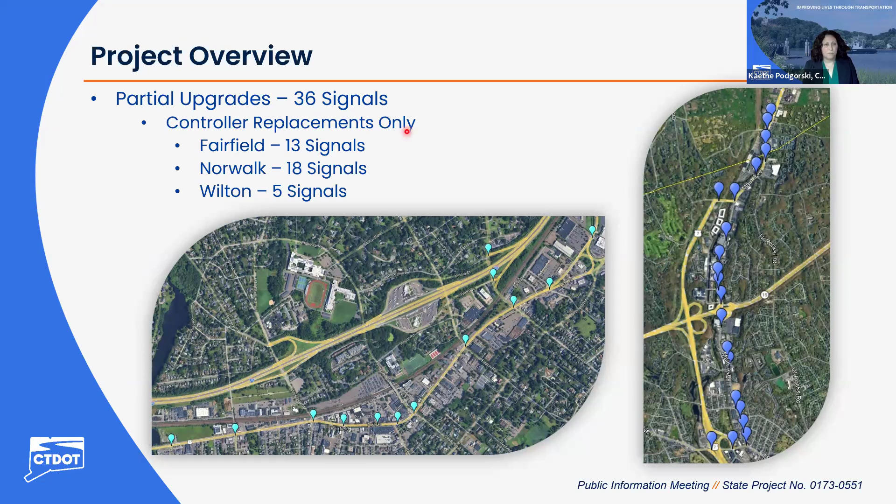In addition to those full replacements, we have 36 locations getting controller replacements only. This is really just upgrading the equipment in the controller cabinet that helps the signal run more reliably and efficiently. There are 36 locations: 13 in Fairfield, 18 in Norwalk, and 5 in Wilton.

For an overview, this is what we call a district various projects. The state owns and maintains about 2,800 traffic signals on state roadways, all over most towns in the state. We have a goal and responsibility to keep signals working in good order. We've collected an extensive database of information about our traffic signals to help identify what condition they're in, and they get ratings of good, fair, or poor based on a number of criteria. Some of that criteria is the age of the equipment, or the structure rating based on inspections done of all our support structures.

We have information documented about all the maintenance calls these locations receive. We also solicit input from folks in our districts who are working in these areas, observing issues and getting the calls. We also take a look at the existing equipment and whether it's outdated in terms of type and application. Hardware and detection equipment in particular are very technology heavy, and they evolve quickly, so they can get outdated fast. These locations have been identified because they have some component that is old, outdated, obsolete, or maybe structurally less than good.

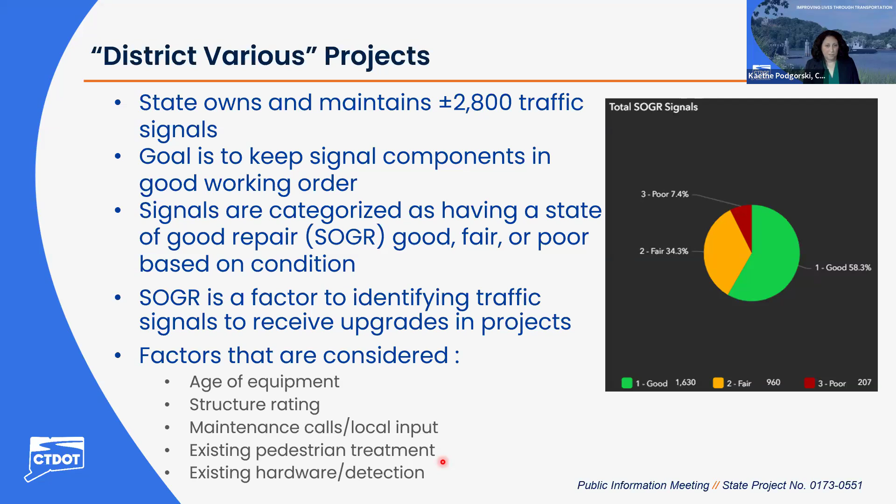So the purpose and need, again, is to replace aging signal infrastructure with new signal equipment to achieve a state of good repair. The improvements you could expect to see at these full replacement locations are new signal equipment, improved and upgraded pedestrian accommodations including installation of curb ramps and sidewalks in some cases, potential flashing yellow arrows for permitted left turn movements where there are exclusive left turn lanes, new vehicle detection, which I'll show you in a few slides, improved access and accommodations at transit stops, and illumination installed to light crosswalks and transit stops on state roads.

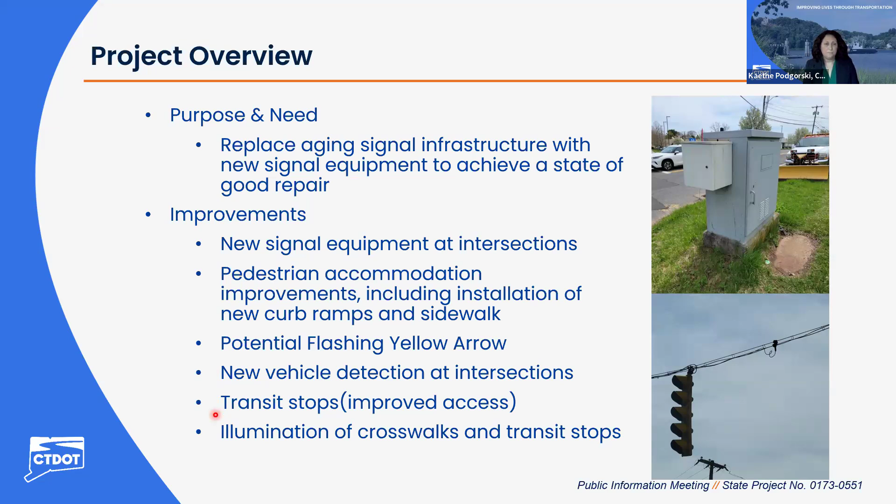So when I talk about traffic signal equipment and installing it to the latest standards, here's a bit more about what I mean. Mast arms are the current preference in the state for traffic signal design. This is a typical mast arm that would be used for a project like this. This one is painted black, which is done per town request, but it's up to the town if they choose not to color the mast arms. Otherwise it would just be a standard grayish color.

Signal heads, so you see the green, yellow, red indications, that's what we mean by signal heads. That's the whole purpose of the signal, all this equipment, hardware, and structures are to get these indications where drivers can see and understand them.

Vehicle detection equipment, we'll talk about that in another slide. Controllers, up at the top right, you see this massive technology and wiring. All of this is contained within a cabinet that's on the roadside next to every traffic signal in the state, so you might see some of those driving around. If you open it up, it would have all of this equipment in it. Some of it is used to communicate with the indications, to tell them which phase goes next and make sure the proper lights turn on in the proper order. And some of the equipment is used to communicate with adjacent traffic signals or a centralized traffic operations center so that they can be monitored remotely. All of this technology will get replaced for these full replacement locations.

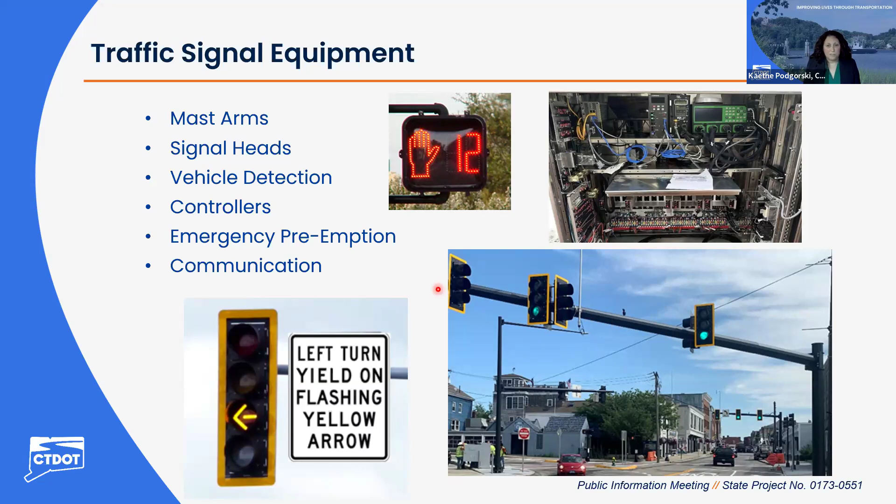In terms of pedestrian accommodations, these are often some of the most noticeable improvements when we do full replacements. A lot of times we're looking to implement complete streets improvements to make our infrastructure more accessible for all road users. So there are new crosswalks added, ADA compliant curb ramps added, sidewalk connections where an adjacent sidewalk terminates, and connections to nearby bus stops. And then pedestrian signals, the flashing hands and the walker indications, along with push buttons to call the phase, a lot of those are being added.

And then what's new in the state is the installation of these blank out signs you're seeing in this looping video. Those are installed and used to call attention to the conflict between right turning vehicles and pedestrians. So when pedestrians are moving at the same time as adjacent traffic, we want that turning traffic to be aware there could be pedestrians in the crosswalk, and pay attention. So those blank out signs are used to assist with that.

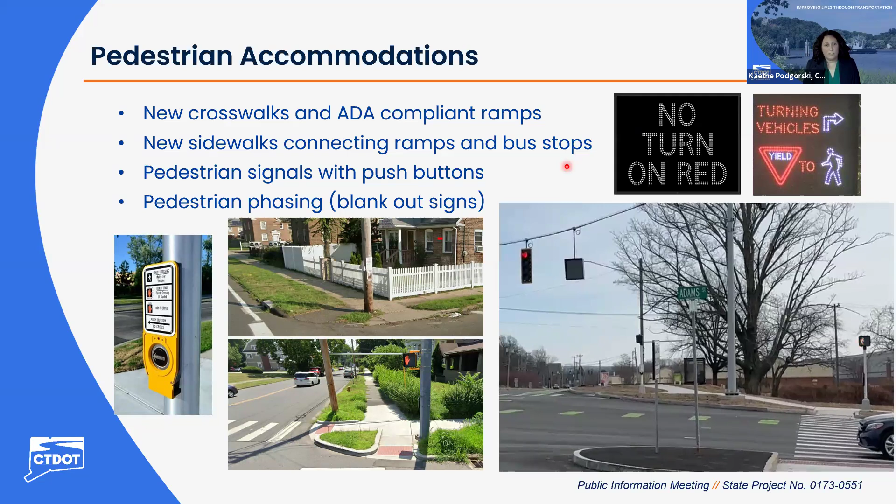Here's the slide to explain what I mean by vehicle detection. The typical detection equipment we like to use in a lot of cases includes a 360-degree camera. You might see some of these attached to mast arms or the top of span poles as you're driving around. These are used to generate an image where we can draw detection zones. Detection zones are areas where we want to know if vehicles are in them, and they correspond to different lanes, some exclusive left or right turn lanes, some on side streets or the artery. Knowing what cars, or if there are cars, or how many cars are in each zone helps the traffic signal decide which phase to call next. It could skip a phase or call a phase, so it can be responsive to the traffic that's at the signal and waiting. There's no recording, nobody on the other end watching this device, it's just a tool to help the signal be more efficient in its operation.

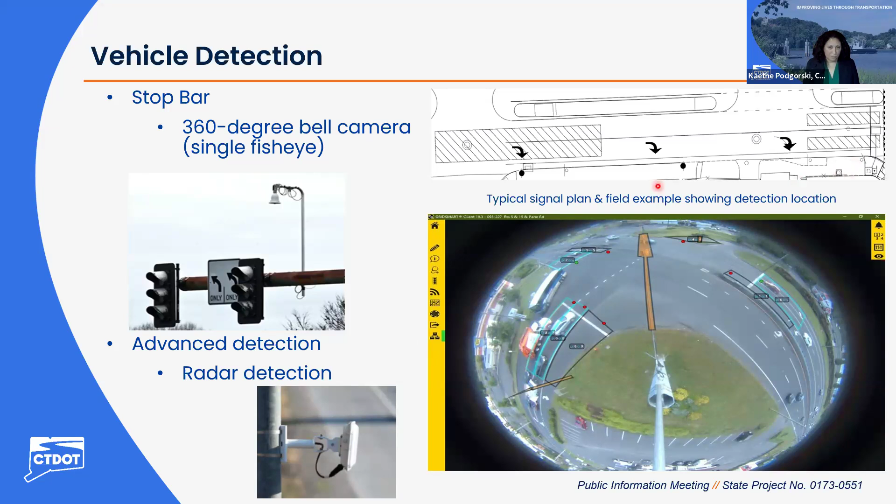And so now we're going to get into the specifics of each of these locations in the project. And for that, I'm going to hand it over to Colleen.

Thank you, Kaethe. Good evening, everyone. My name is Colleen Byrne. I'm the consultant project manager with Tighe and Bond supporting CTDOT on this project. Our team has been assisting DOT with the engineering and design of the proposed signal improvements.

Now I will walk through the 13 intersections included in the full signal replacement portion of the project and highlight the proposed preliminary concepts for each location. These layouts represent our current preliminary designs, so they will continue to be refined as we receive public input, complete our utility coordination, and advance through the final design process.

For each intersection, I'll first orient you to the aerial photograph in the top left corner, and then I'll walk through the proposed improvements shown on the colorized plan on the right side of each slide.

Before we begin, I'll briefly explain the legend shown at the bottom of each slide and what that color coding means. The dark blue represents our new mast arms, while the green indicates the proposed signal heads, those triangles. The purple and pink highlights are our proposed sidewalks and ADA ramp improvements. The yellow is the proposed crosswalks. The orange indicates a new or proposed relocated stop bar. And the light blue identifies areas where temporary or permanent easements may be required. That's not shown on the specific plan, but I'll highlight those as we go through each location. The green box with the X in it is our controller cabinet, located at each location. So the same color scheme is used throughout each location.

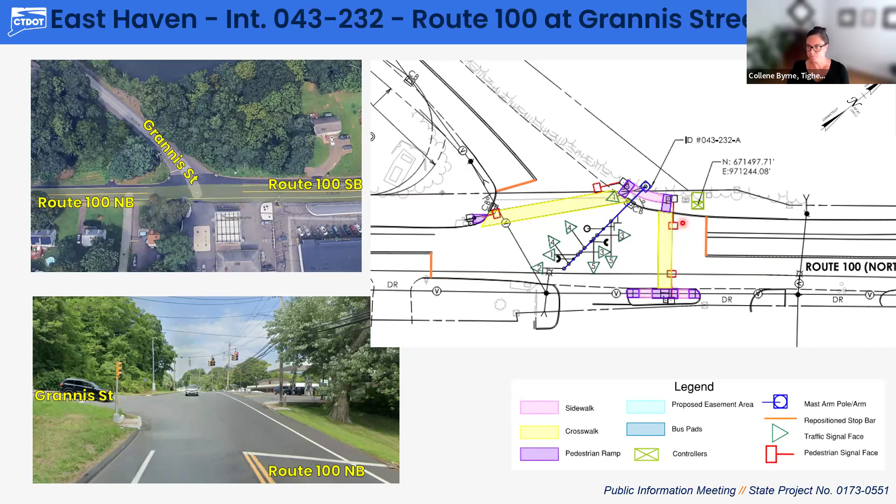We're relocating stop bars to accommodate those proposed crossings. Each end of the crossing will have a new sidewalk ramp installed with connecting sidewalk segments in between, and those red rectangles represent our pedestrian signal faces at each side of the crossing. As I mentioned, there are no easements at this location.

So next we're in Fairfield, intersection 050-214. This is US Route 1 at Brick Walk Drive and the USPS post office. As with other locations in the project, we're fully replacing all the equipment, including 2 new diagonal mast arms on the northeast and northwest corners of the intersection.

It's a relocated crosswalk that's being moved from the north side of the leg over closer to the intersection. And sorry, I forgot to orient us.

Going back to the aerial in the top left corner, US Route 1 is the northbound southbound route running horizontally across your screen, with the post office drive intersecting from the west at the top of the screen and Brick Walk intersecting from the bottom of the screen. The view in the bottom left corner is from US Route 1 northbound approach, so in this one, Brick Walk Drive is on the right side intersecting.

So going back to the layout, sorry. We're proposing to relocate the crosswalk that's existing further to the north, bringing it into the functional area of the signalized intersection. This will provide better pedestrian accommodation and safety throughout this area.

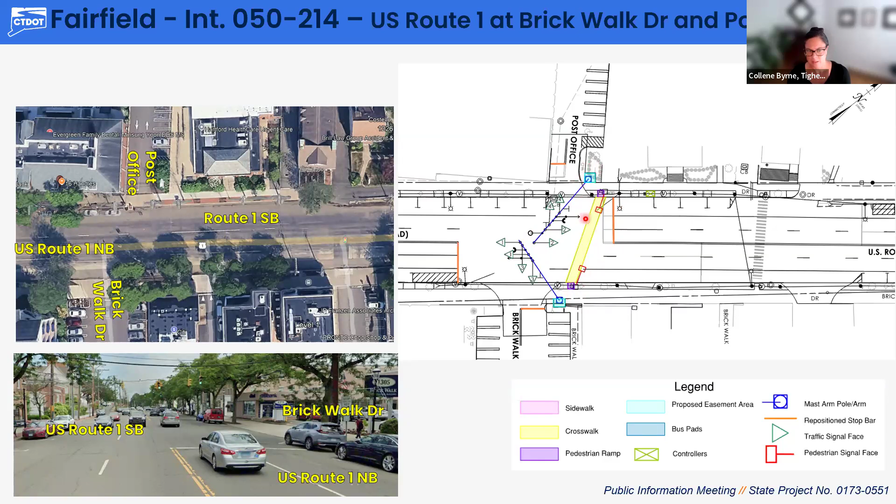Moving on to the next intersection, we are now in Milford, intersection 083217. We're still on US Route 1, but we're at Lansdale Ave. In the aerial view in the top left corner, US Route 1 is running horizontally with Lansdale Ave intersecting from the south at the bottom of the image.

The street view imagery on the bottom left is from the US Route 1 northbound approach, where Lansdale Ave is intersecting on the right side of the screen. This intersection is proposing one new crossing across Lansdale Ave and replacing the 2 existing crossings on the east and west legs of US Route 1. There are 2 mast arms serving this intersection: a diagonal mast arm in the bottom right corner, and a perpendicular mast arm to the US Route 1 approach in the top left corner of the intersection.

There are a couple of easements identified to accommodate the proposed installation of the sidewalks and sidewalk ramps. Across the top side of the screen, there's a larger area for driveway reconstruction and sidewalks, and in the bottom right corner of the intersection to accommodate installation of the mast arm. I want to highlight that there are 2 bus transit stops proposed, with existing transit stops getting proposed boarding pads, one on each side of US Route 1 adjacent to the intersection, along with 3 relocated stop bars at that location to accommodate those crossings.

Moving on to North Haven, intersection 100217. This is Route 22 at Bishop Street and State Route 725. In the top left corner aerial, SR 725 is the north leg, and Route 22 runs horizontally across the screen left to right, with Hartford Turnpike intersecting from the bottom. The street view imagery is from the Route 22 eastbound approach, so SR 725 northbound intersects from the left and Hartford Turnpike from the right.

This intersection proposes 3 new mast arms, one in the southeast, southwest, and northwest corners. There are 2 proposed crossings, which are new to the intersection, on the south and west legs. Each will have associated ramps and sidewalk segments connecting them, along with pedestrian signal faces. There is one relocated stop bar on the south leg to accommodate that proposed crossing, and a small easement in the northwest corner to accommodate installation of the mast arm and sidewalk ramps.

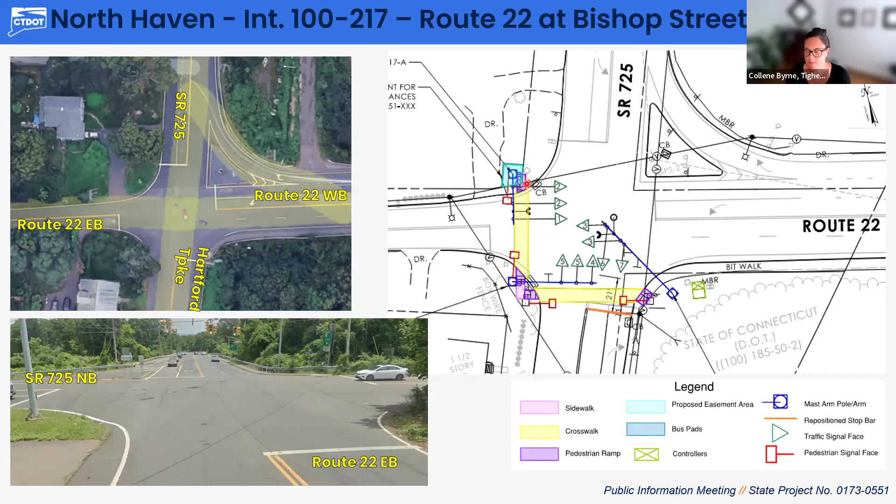We're still in North Haven, now at intersection 100241. This is SR 725 at the Route 15 southbound ramps. The image in the top left corner shows the Route 15 southbound ramps intersecting from the bottom or east leg, with SR 725 on the left side of the image intersecting from the south, and Hartford Turnpike on the right.

The street view image on the bottom is from the Hartford Turnpike southbound approach, where the Route 15 southbound ramps are on the left side. This intersection proposes 4 new mast arms, one on each corner, with 4 new crossings, one on each leg. There are proposed sidewalk ramps, pedestrian signal faces, and connecting sidewalk segments on each corner. There is a proposed easement area in the top left corner to accommodate installation of the mast arm foundation, and one relocated stop bar on the west leg at the top of the intersection.

At this intersection, we're also looking at proposing some potential phasing or timing improvements and potential coordination with adjacent intersections to help improve operations and enhancements that can be incorporated within the scope of the project.

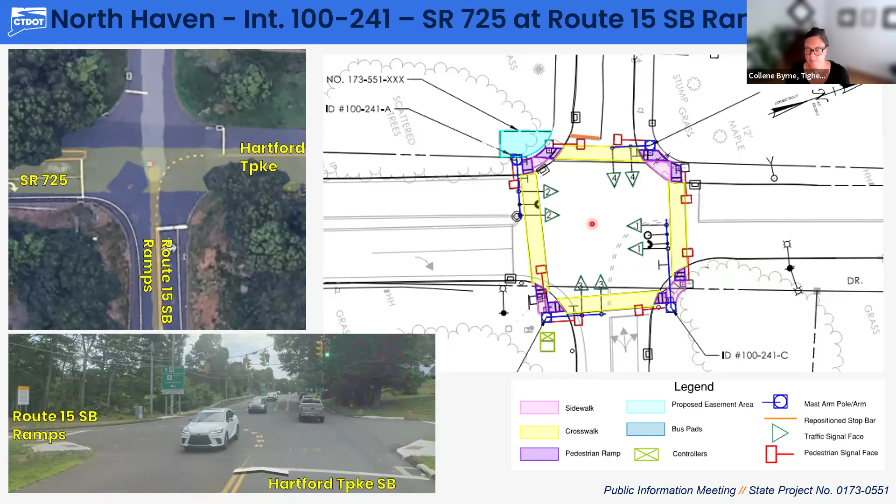Next intersection, still in North Haven, is intersection 100-242, the Route 22 at the Route 15 northbound ramps. There are 2 diagonal mast arms at this location. Going back to the aerial in the top left corner, Route 22 runs left to right across the screen horizontally, with the Route 15 northbound ramps intersecting at the bottom of the image.

The street view image in the bottom left corner is from Route 22 eastbound, where the Route 15 northbound ramps intersect from the right side. Those 2 diagonal mast arms serve the 3 approaches of this intersection, with 2 new proposed crosswalks across the east leg and the south leg. There are sidewalk ramps and sidewalk segments connecting in the bottom right corner, with a small easement area to accommodate those proposed ramp and sidewalk installations.

We have a proposed relocated stop bar on the east leg of the intersection to accommodate installation of that proposed crossing. Again, at this intersection we're looking at coordination options to combine the 3 North Haven intersections into a larger system to provide some potential operational improvements.

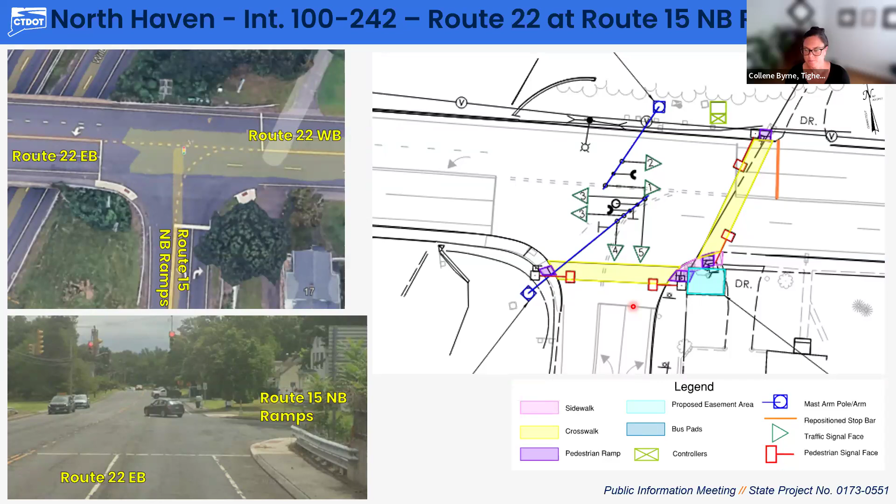So we are moving on to Norwalk. We are at intersection 102-270. This is SR 719 at the Merritt 7 driveway and Valley View Road.

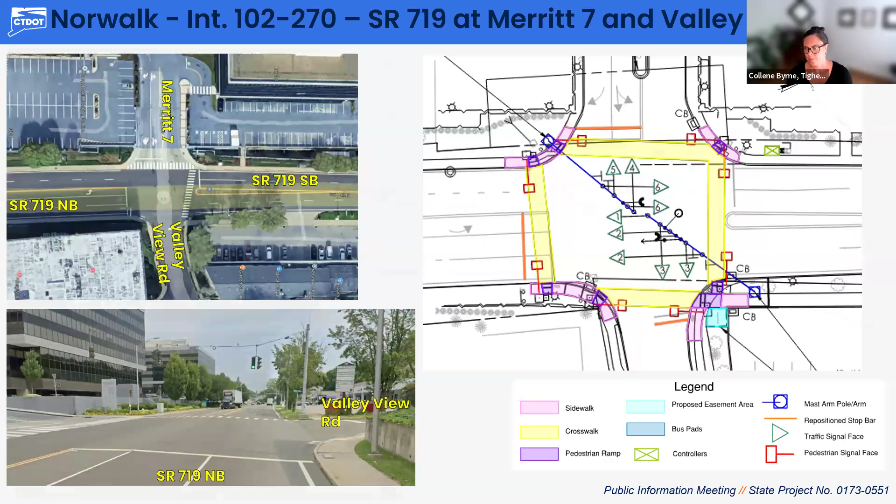So we're still in Norwalk, but now at intersection 102-283. This is Route 136 at Martin Luther King Jr. Drive and Old Trolley Way.

This intersection has a unique configuration with State Route 136 on the north leg, continuing on the east leg on the right side of the screen, with Old Trolley Way intersecting on the bottom of the image and MLK Jr. intersecting from the left. From the street view imagery at the bottom, Martin Luther King Drive is the approach being viewed, with Old Trolley Way intersecting on the right side of that image.

This intersection is proposed to be served by 3 new mast arms, at the top left corner, top right corner, and bottom right corner. There are 2 new proposed crossings, across the north leg of Route 136 and the west leg of MLK Jr. Drive. A small easement area may be required in the top left corner to accommodate installation of equipment. Those 2 crosswalks are served by new pedestrian ramps and connecting sidewalk segments, and 1 small stop bar relocation is required on the Route 136 southbound approach to accommodate that proposed crossing.

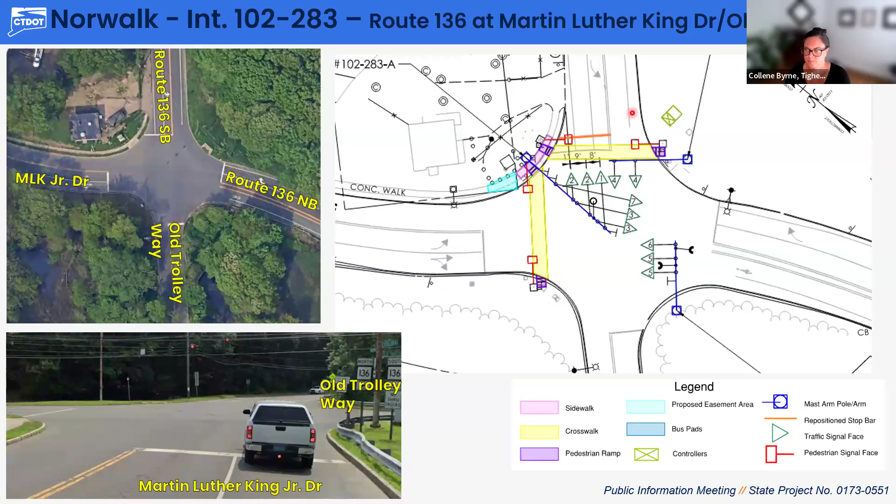Moving on to Trumbull, intersection 144-248. This is State Route 743 at Route 8 northbound off-ramps. In the aerial image in the top left corner, SR 743 runs northbound southbound horizontally across the screen, with the Route 8 northbound off-ramp intersecting from the top. The street view image in the bottom left corner is from SR 743 northbound, where Route 8 northbound off-ramps intersect from the left side of the image.

This intersection is proposing 1 new diagonal mast arm located at the bottom side of the intersection, serving all 3 approaches. There is a supplemental head proposed at the off-ramp on the top right corner to also service that northbound off-ramp approach. We have 1 new crossing, on the SR 743 northbound leg with connecting ramps at either side and pedestrian signal faces serving that crossing. There is a small stop bar relocation proposed on the north leg of the intersection. I think there are no easements on this one.

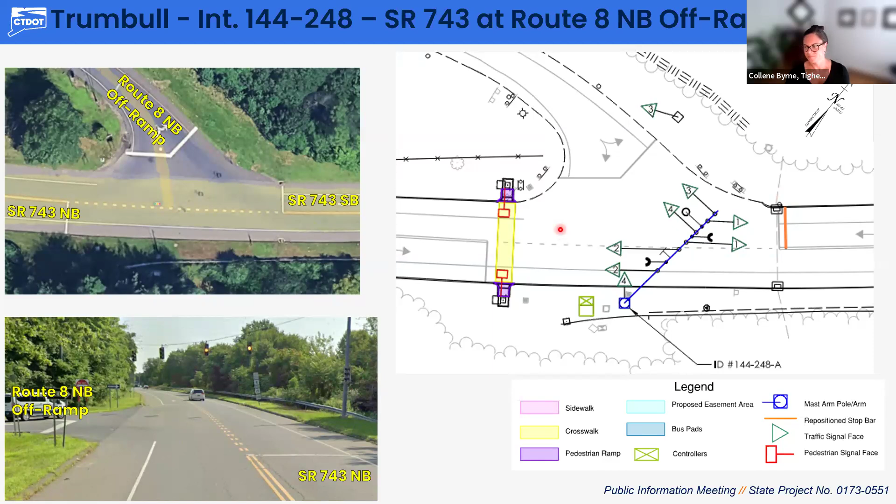So moving on to Wallingford, intersection 148-261. This is US Route 5 at Home Depot and Neal Road.

In the aerial imagery in the top left corner, US Route 5 runs northbound southbound horizontally across the screen, with the Home Depot driveway intersecting from the top, the west leg, and Neal Road at the bottom, the east leg. The street view image in the bottom left corner is from the US Route 5 northbound approach, where Home Depot intersects on the left side of the image, and Neal Road is on the right side.

Looking at this intersection, we have 4 new proposed mast arms, 1 serving each approach. There are 4 new proposed crosswalks, 1 across each leg, with associated sidewalk ramps, pedestrian signal faces, and connecting sidewalk segments on each corner. There are a few stop bar relocations on 3 of the 4 approaches, mostly to accommodate those crossings, and a couple easements at the top right, top left, and bottom left corners, all to support installation of either the mast arms, sidewalk, or the traffic signal controller in this case.

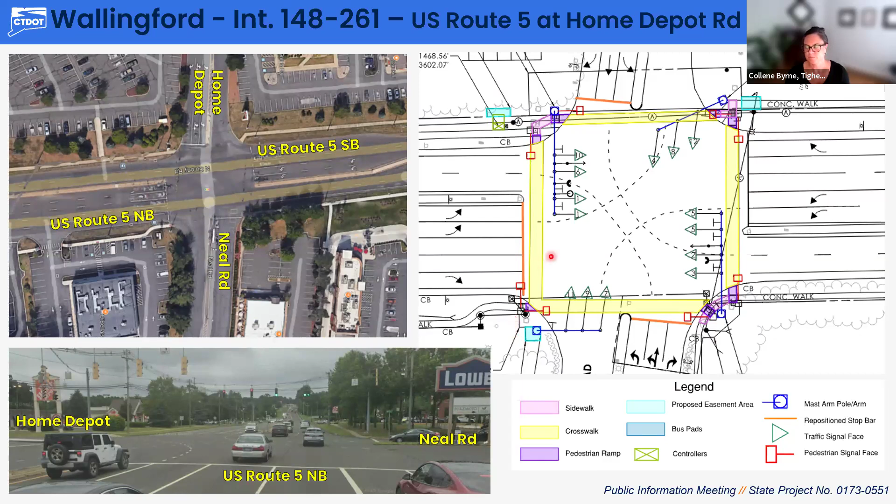Next intersection, we're moving on to West Haven. This is intersection 156-239, US Route 1 at Peabody Street and the Warehouse Foods driveway. In the aerial image in the top left corner, US Route 1 runs northbound-southbound horizontally, with the Warehouse Foods driveway intersecting from the top and Peabody Street from the bottom. The street view imagery in the bottom left is from US Route 1 northbound, where the Warehouse Foods driveway intersects from the left and Peabody Street comes in on the right.

This intersection is proposed to be served by 4 new mast arms, 1 on each corner, supporting the far side approach, with 4 new crosswalks, 1 on each leg. Each has associated sidewalk ramps, pedestrian signal faces, and sidewalk connections. We also have sidewalk extensions across the top side, one connecting into a proposed boarding pad for a transit stop in the top left corner, and the other, top right corner, is a reconstruction of sidewalk connecting to the north on US Route 1. There are a few stop bar relocations on the top and bottom of the screen to accommodate those proposed crosswalks.

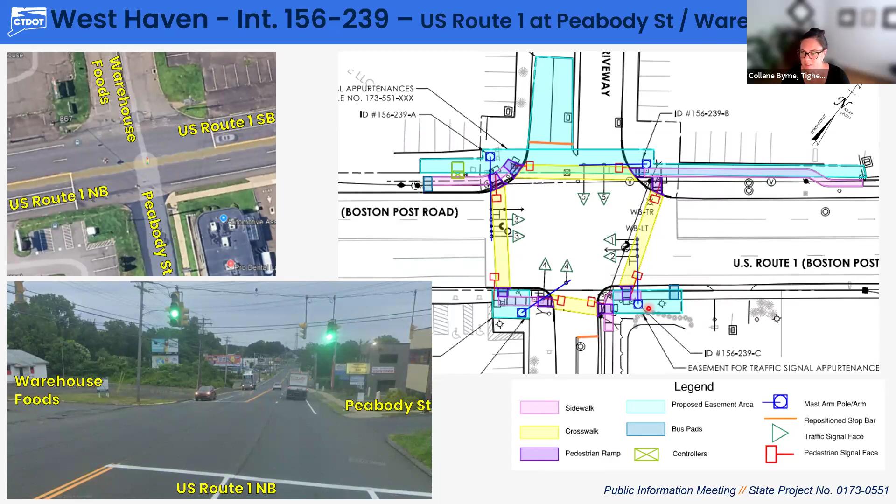We're still in West Haven. This is intersection 156-245, Route 162 at Knight Lane. In the aerial image, Route 162 runs eastbound-westbound horizontally, with Knight Lane intersecting from the north, or top of the image. In the street view imagery in the bottom left, Route 162 westbound is the approach shown, where Knight Lane intersects on the right side of the image.

Here we have a single diagonal mast arm serving all 3 approaches of the intersection, with 3 crossings on the north, east, and west legs. 2 of those are new crossings, and the proposed crossing on the left side is an existing crossing. We have supporting sidewalk ramps at each crossing location, and some reconstruction of sidewalk to connect to 2 existing transit stops in the top right and bottom left corners, plus additional sidewalk extensions to connect back to existing sidewalk or infill where it doesn't exist today. Each has associated ramps and pedestrian signal faces, with a few small proposed easement areas on the top left, top right, and bottom right corners to support installation of traffic signal equipment and sidewalk, and in the bottom right corner, the mast arm foundation and controller.

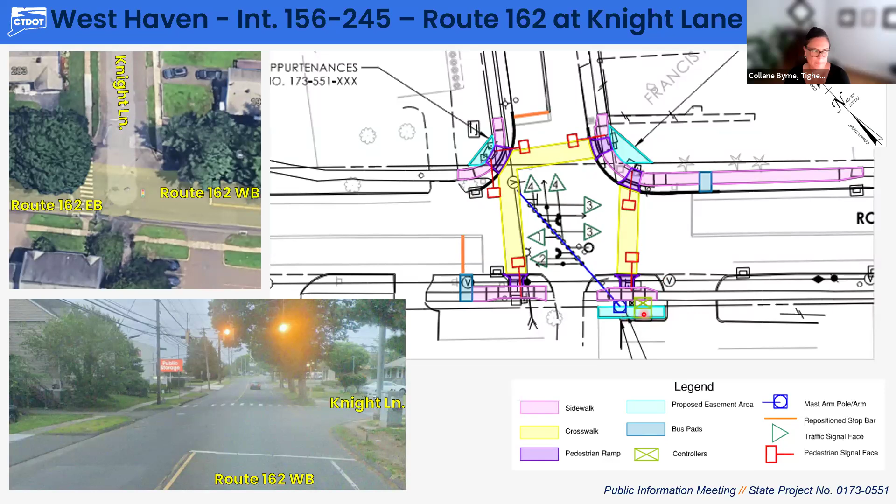Our last intersection, but not least, we're in Westport, intersection 158-221. This is US Route 1 at Maple Avenue North and South. In the aerial image, US Route 1 northbound-southbound runs horizontally left to right, with Maple Avenue North intersecting on the top side and Maple Avenue South as the bottom leg. The street view image is taken from Maple Ave South, so US Route 1 intersects on the left and right side of that street view.

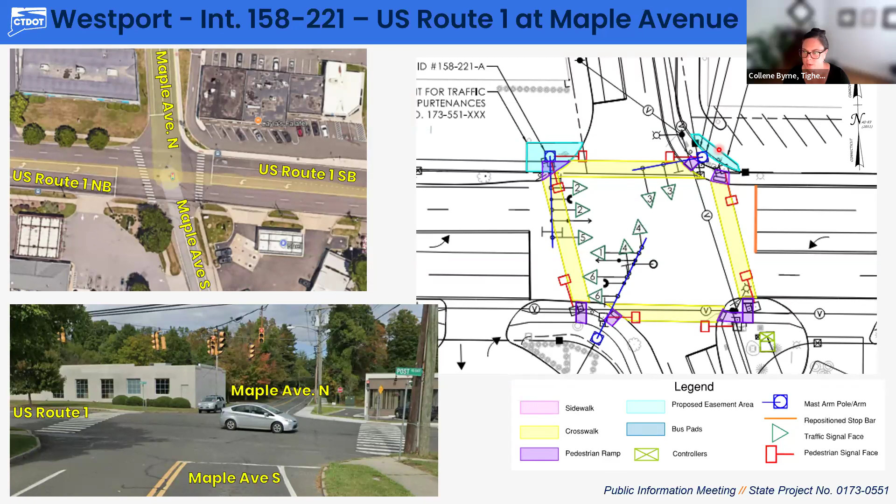We are proposing to serve this intersection via 3 new mast arms, at the top right, top left, and bottom left corners. There are 2 existing crossings today across both legs of US Route 1, but 2 new additional crossings are proposed across Maple Avenue North and South. Each is serviced by new sidewalk ramps with sidewalk connections. There are 2 small easement areas in the top left and top right corners, both to accommodate the proposed mast arm and sidewalk installations.

That wraps up all of our preliminary intersection reviews for our full replacement intersections. Just a couple of things on overall project coordination: through the design process, CTDOT has been coordinating with our municipalities, utility companies, and other stakeholders.

Project notification letters were sent out to the municipalities in July of 25. And more recently, requests were sent for design considerations in March of 26.

Our utility coordination is ongoing. We'll have a virtual utility meeting this summer with the utility companies at each of the locations, followed by field meetings with both the municipal representatives as well as our utility companies, later this summer or early fall.

We're also having this virtual public information meeting today, July 14th, 2026, to gather input from the municipalities and the public on our designs.

Touching on right-of-way and potential right-of-way impacts: one additional aspect we've mentioned in some of the project layouts is the right-of-way coordination and potential easements. Our goal through our design process has always been to keep our improvements within the public right-of-way wherever we can practically.

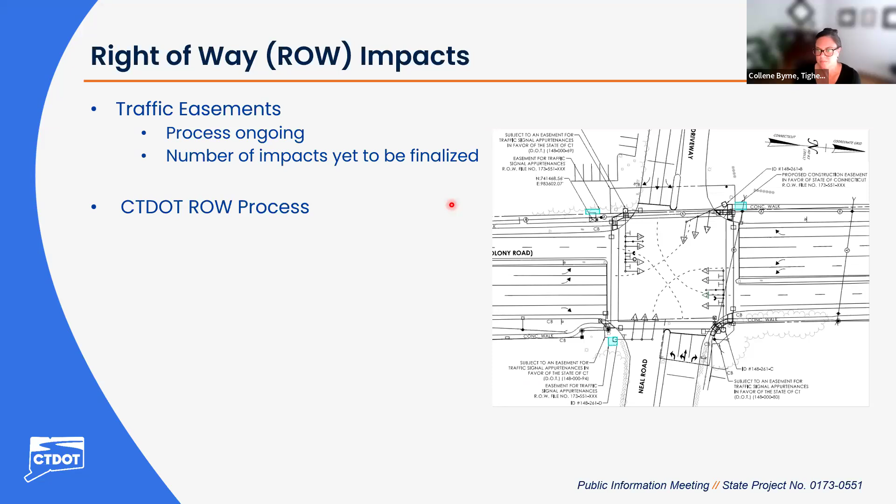Thank you, Collene. Good evening. My name is Jack Carlson, and I'm a project coordinator with the Department's Division of Rights-of-Way. Our office is responsible for acquiring the property rights needed for transportation projects. As Collene mentioned, this project will require the acquisition of property rights, so I'd like to give a brief overview of our acquisition process.

First, I'd like to introduce the different types of agents you may interact with in our rights-of-way office if you were to have an impact on your property. You have our administration agents, such as myself, the project coordinators. You have our title searchers who visit the town hall and search the land records to ensure that the property owner is correct and that there are no encumbrances or liens that would prevent the acquisition of property rights.

There are licensed appraisers who provide a cost estimate for the total project as well as appraisal of the property, depending on the complexity of the acquisition. You have our acquisition agents, who are negotiators that may provide a valuation and will be the agents you would primarily interact with once the project has reached that stage.

And then our title closing agents, who prepare the easement deeds, the warranty deeds, as well as request the maps and render payment and meet with you to finalize the acquisition.

Again, any required property rights will be acquired in accordance with Connecticut General Statute Section 13a-73 and 13a-98e, as well as the Federal Uniform Act. And as Collene mentioned already, the specific right-of-way impacts are still being finalized and may change as the project design progresses.